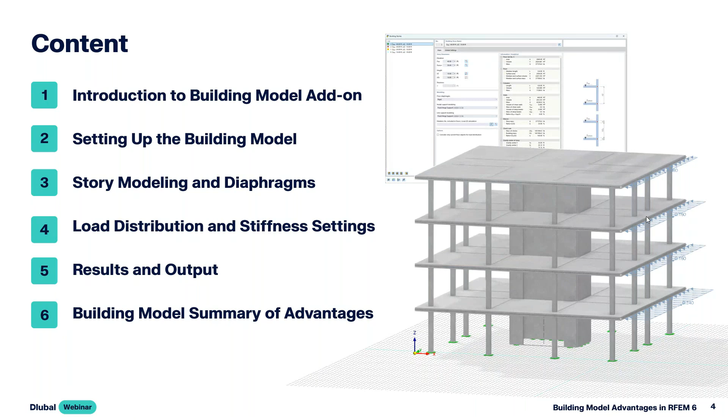For those of you familiar with RFEM 6, we operate with this add-on concept. This multi-story structure can certainly be modeled in RFEM 6 alone. However, the building model add-on offers advantages in addition to the base program. The first is to apply story-based organization. We can take this 3D model within this general FEA software and define stories, which is ideal for multi-level structures. This allows us to make quick changes to our floors rather than manually editing them.

We also can carry out the gravity and lateral analysis together within one file. We don't need two separate programs, we don't need two separate files. We'll see today how that can be carried out.

We also can simplify the load distribution and apply diaphragm stiffness settings across our floors. We'll discuss those two topics in detail today. This is certainly possible within RFEM 6 alone, without the building model add-on, but we'd have to manually modify the stiffness matrix of our floor directly. When we utilize both a semi-rigid and rigid diaphragm, we also have the ability to separate the 3D wall from the 2D floor calculation, which we'll cover in our example today.

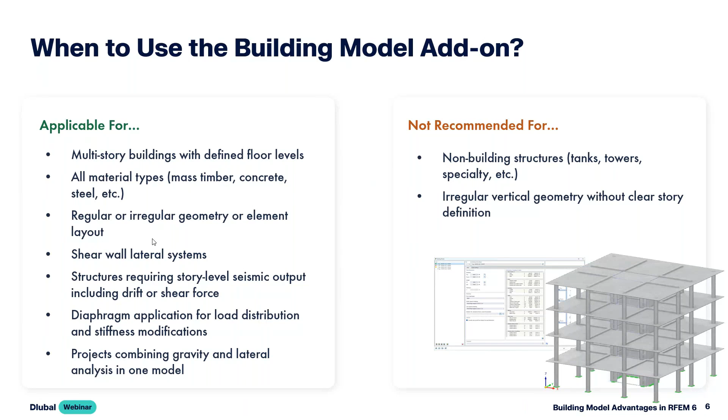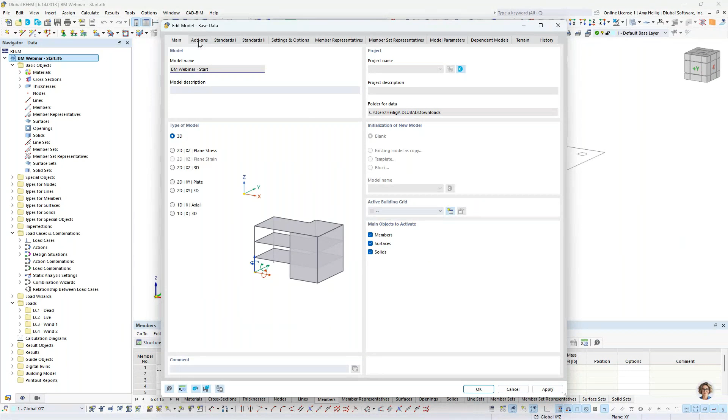Okay, so we will get into our first example today within RFEM 6 directly. When you begin a new model, you are presented with the base data dialog box, and the type of model will be in the 3D environment. The second tab within the base data is all of the available add-ons, so we'll be focusing entirely on the building model add-on, which is activated for today's example.

But as mentioned, it would be quite common to pair this with some of the additional design add-ons, like concrete design, to carry out the reinforced concrete design according to the ACI or the CSA standards. Steel design, timber design for mass timber structures is certainly also possible. We will be generating our load combinations automatically according to the ASCE 7 2022 standard, but of course, many other international standards are supported.

So once we have defined this information, we are within the main program RFEM 6. You'll notice here that I have already imported a DXF file as a background layer, which will just assist me with my modeling. If we go to guide objects, and I'll collapse this additional folder here, down at the bottom within background layers, this is where I have imported a DXF file directly from something like AutoCAD. You can see the elevation was set at 10 feet in height.

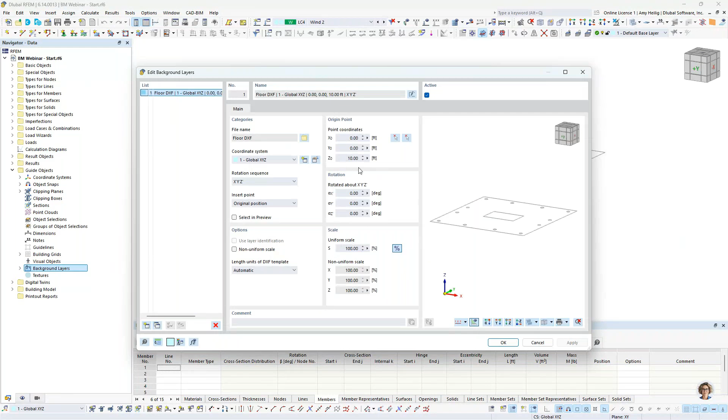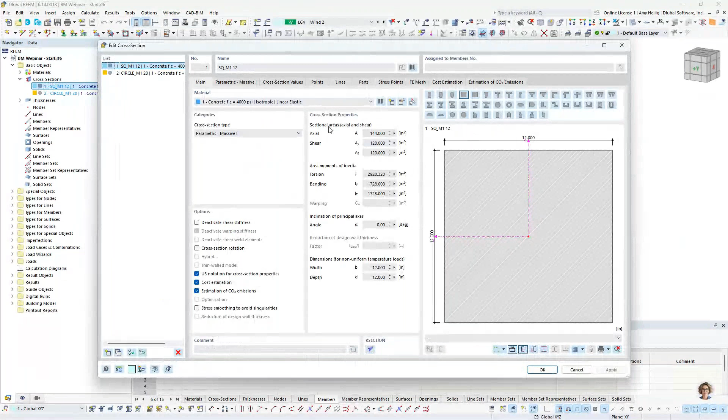I also have defined here some basic objects just to get our model started today. For example, I have defined already from our material library 4,000 PSI concrete—it will be a concrete structure for this example. I also have defined a couple of cross sections: a square cross section, 12 inches by 12 inches, that I'll use for my beams, and a circular cross section, 20-inch diameter, that I will be using for the columns, both with the 4,000 PSI concrete assigned.

I also have a couple of thicknesses defined. Thicknesses are assigned directly to 2D surfaces within RFEM. The first thickness is 8 inches, which will be used for our elevated slabs. And then we also have an additional thickness of 12 inches that will be used for the shear walls, again, both assigned with that concrete material.

So we want to begin modeling our structure, but before we do, I'm going to access the building model folder over on the left—this is only available because I've activated this particular add-on. I can right click here to create a new building story. Now, this dialog box we will get into in much more detail a little bit later on, but I want to initially define my first story with a height of 10 feet, and I'm going to create 3 additional stories here, again, all with a varying height of 10 feet. So 4 stories defined—we'll get back into this dialog box a little bit later to explain it.

So we see those listed here under the stories. We're now ready to begin modeling, and I will go into an elevation view here and utilize this background layer. With the building model add-on, we have some additional tool options here that are not available in RFEM 6 directly, and this is just to make our life a little bit easier when we're modeling these elements at every single story for a multi-story structure.

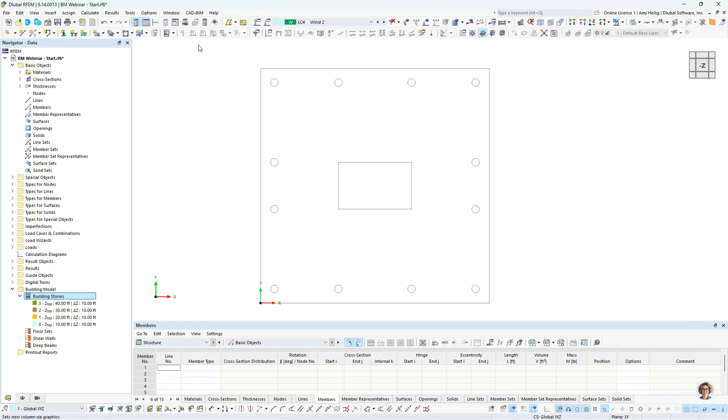We will begin here with defining and drawing our column elements. So we go ahead and select column from this special toolbar, and the member type is set to beam. Remember, RFEM is a general FEA program.

A beam is really just any type of standard member. It could be a beam, could be a column. So we'll go ahead and leave that member type as such.

The cross section for our columns, we want to toggle down to the existing circular cross section we already have defined. Now we could additionally add moment releases such as hinges at the member ends. If I don't define anything here, everything is considered fully fixed.

But you'll notice a special dialog box here, specific to the building model tools, where I can draw this column but apply it to all stories. So all stories are activated here.

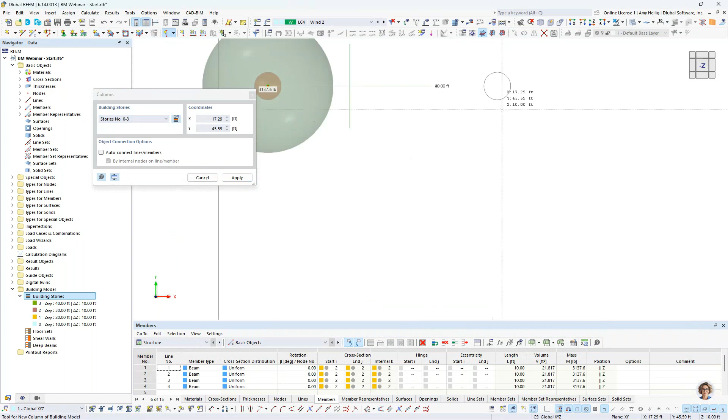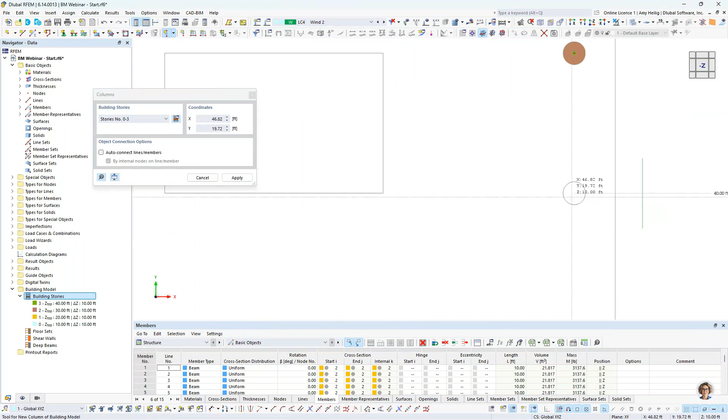Now when I zoom in to my DXF drawing grid, we can apply these columns by a single click at the center of the background layer. Now, what else you'll notice is this big ball here that adjusts every time I snap to create a new column. This is the center of mass, so it detects every time a new element is added to the model and will adjust accordingly graphically.

So we go ahead and assign the additional columns at the bottom of our page. I can right click to exit out of this tool. And if I turn this to an isometric view, you can see these columns were applied to every floor level. So again, these building model tools can be efficient.

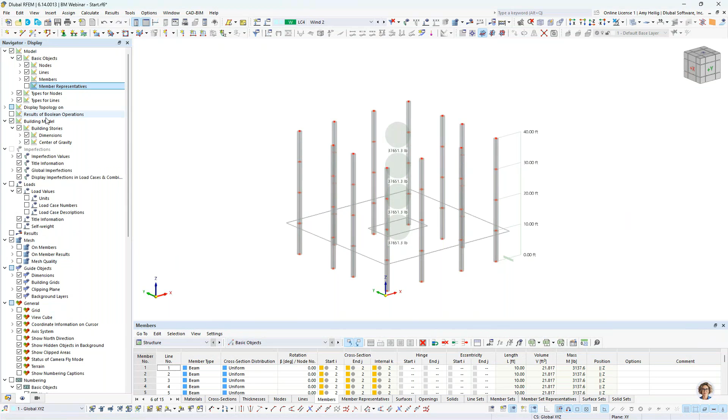I will go ahead and hide what we call our member representatives graphically. Also, if the center of gravity or center of mass gets in your way graphically, we would just go to the navigator, the second tab, and under the building model, deactivate that. So going back to the plan view, we want to move on to drawing our beam elements.

So again, utilizing the building model tools, we have the ability to select a new beam. Exact same workflow as we saw for the columns, but this time I do want to select my square cross section. I click OK, and then I am going to snap directly to the center point of my column. I right click once to exit that out.

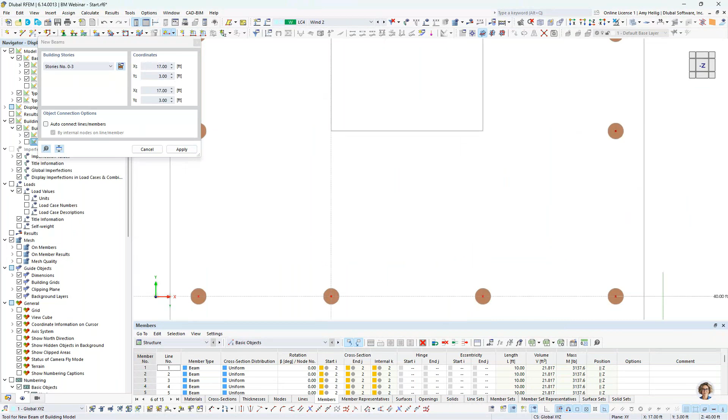Go ahead and do the same thing here. I will be connecting these to what will be our shear walls eventually. Now, these can be thought of as collector beams, for example, transferring these lateral loads from the columns to the shear walls. And we'll go ahead and apply these beams at the left-hand side and finally at the right-hand side.

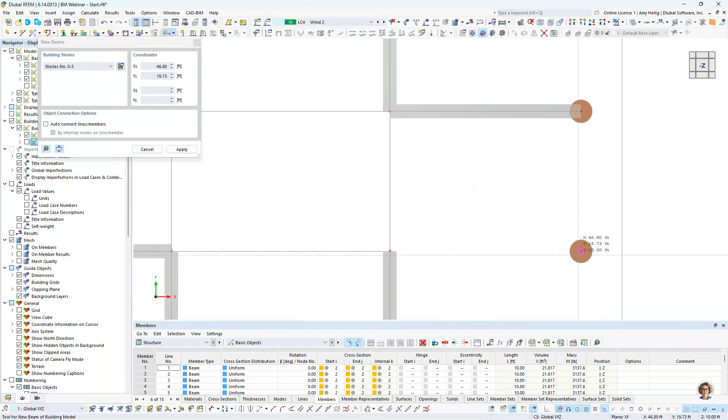Okay, so now that the beam elements are defined, those should be applied to every floor. We right click to exit, and we're now ready to draw our elevated slabs.

Within my building model tools, I'm now going to access a new rectangular floor. This is going to be a two-dimensional surface element. I've already defined the thicknesses within the model, so we will select our 8-inch thick 4,000 PSI concrete from the dropdown. I click OK, and then this only requires 2 clicks from left to right, and now my elevated slab should be applied at every floor.

So we likely need to have some opening passing up through the center of each floor here through these elevated slabs. So once again, we have a nice feature within the modeling toolbars where I can draw a new rectangular floor opening. But this time I don't want to apply it to my top story, only to the first 3 stories.

So once I have that selected, I can go ahead and click on 2 points to apply that opening. And if I toggle this to an isometric view, you will see that those openings are now applied to stories 1, 2, and 3, but not the top level.

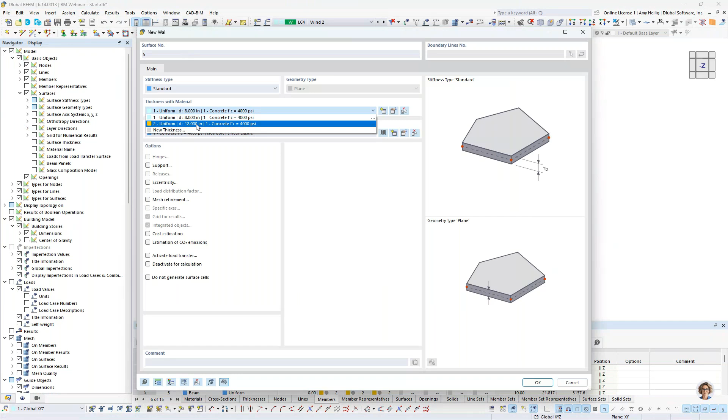The final modeling element that we want to apply here are our shear walls. So we will go back into the plan view, and we'll select a new element from our modeling toolbar, such as a wall. This time we want to toggle the thickness to 12 inches.

And I click OK. I'm going to zoom in here, but remember we deselected our top story. So I'm going to go ahead and select all stories again to apply these shear walls. And then I can simply snap here to my points to draw in these 4 shear walls.

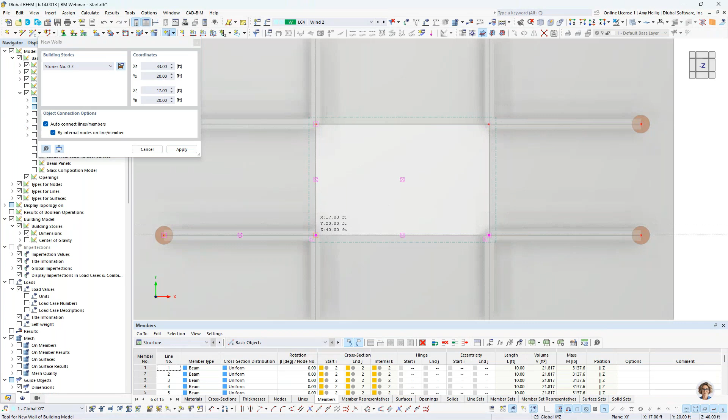And I'll go ahead and close the loop here. I can right click to exit twice, and now we have our shear walls modeled.

The final modeling step is we probably want to add in openings to the shear wall, maybe for an elevator, stairs, whatever it may be.

So going back to the plan view, let me turn this into wireframe, and I'll select only the front shear walls to create a visibility by selected objects. You can right click to deactivate the hidden objects.

Now also this DXF background, if we wanted to turn that off, we could do so within the navigator over on the left.

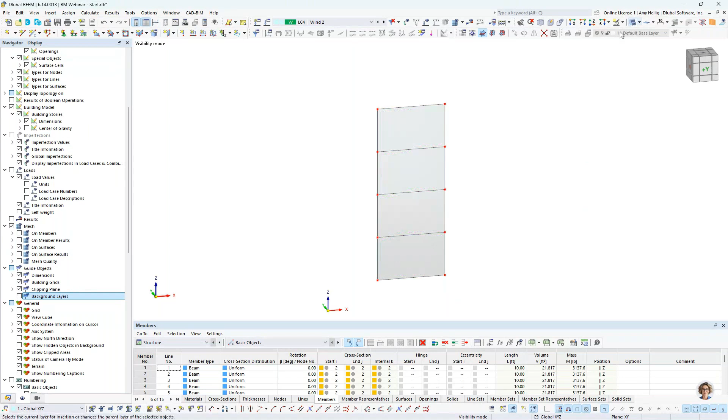Turning this into a rendered view, I want to activate my drawing grid, so we will snap this drawing grid to assist us with adding that opening, change the orientation, and I want to apply a new opening.

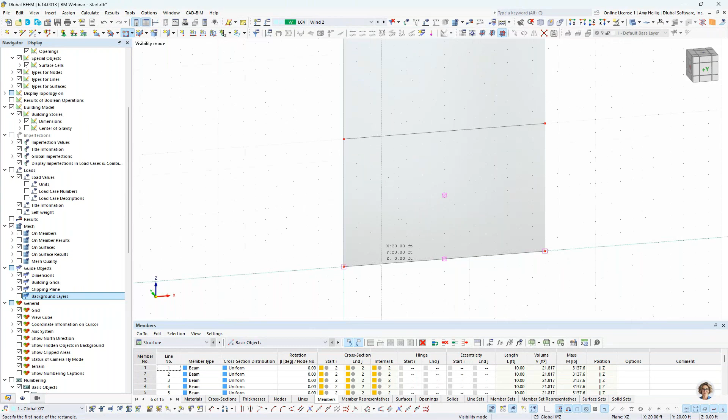This is just going to be a standard opening tool that we find within RFEM 6 directly. So a new rectangular opening, and I'm going to snap here from my point, which is about 3 feet from the edge. My second point will be an additional 3 feet, and we have our opening modeled.

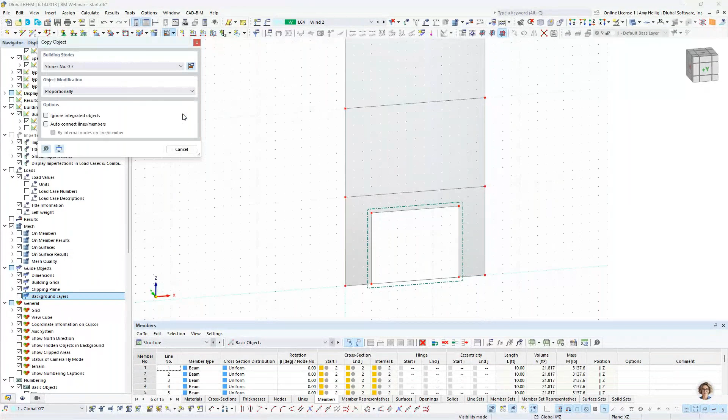A nice feature going back to these modeling tools is this option to copy an object. I certainly could use my Move Copy tool, located here in my toolbar, to copy this opening up. But with the building specific tools, when I choose the option to copy an object, all my stories are selected, and I can click on this opening directly, and you'll notice that it replicates it up to all of my stories.

The quick thing to do here for support reasons is I would like to divide this line where the opening occurs, so I'll use my connect lines tool just to break apart that line. Canceling out of this visibility mode, we are fully done with the modeling of our structure.

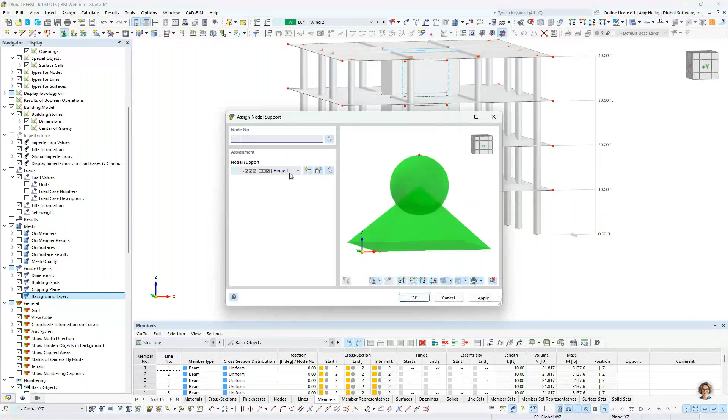What we would like to do now is apply supports at the base. So we will apply new nodal supports, and we'll use the default option here as hinged supports. I click OK, and then I can graphically highlight over or click on the various columns here. We have one more column in the back, I'll go ahead and apply this to. I can right click to exit that tool.

Now we also want to apply line supports to the base of our shear walls. In a similar fashion, we will select the new line support option, take advantage of the default fully rigid support type, click OK, and then graphically select my lines at the base of the shear wall.

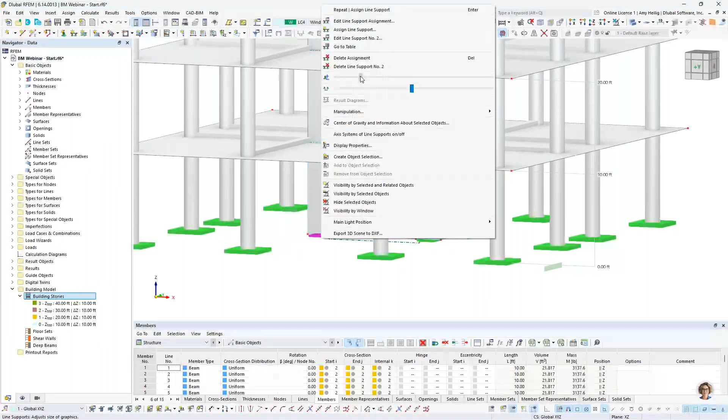So visually looking at the support options, I can always right click to decrease the size of these. Maybe if I want to increase the number of supports on a line support, I can do so. Same concept here for the nodal supports - if I want to decrease the size, we can always use this slider.

So now we would like to move on to some simple loading for today's example, and I'm going to go into my load cases and combinations dialog box. Remember, we are generating our load combinations automatically according to the ASCE 7 with this combination wizard turned on.

I did already create 4 simple load cases for our structure today. I have defined dead load with self-weight activated, we also have a live load, and then we have 2 wind loads. All of these have the action category set according to the ASCE 7, as we need to know how to combine those into the load combinations.

So jumping to the load combinations themselves, we can see all of our factored load combinations generated in orange and all of our unfactored load combinations generated in red.

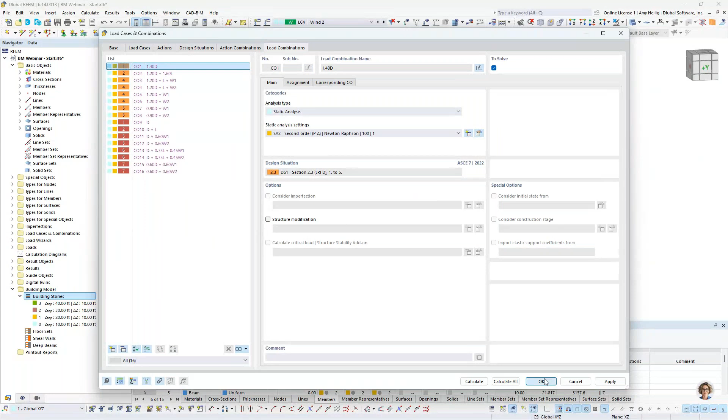Now that those load cases have been defined, we need to actually apply the loads to the structure. So we can jump to our dead load, and for today's example, very simple loading applications, we will apply a new surface load for our dead load. The load magnitude here is going to be set at negative 0.05 kips per square foot in the global z direction, and then I can graphically select my surfaces to apply this gravity load. I'll use my selection box here to highlight surfaces 1 through 4.

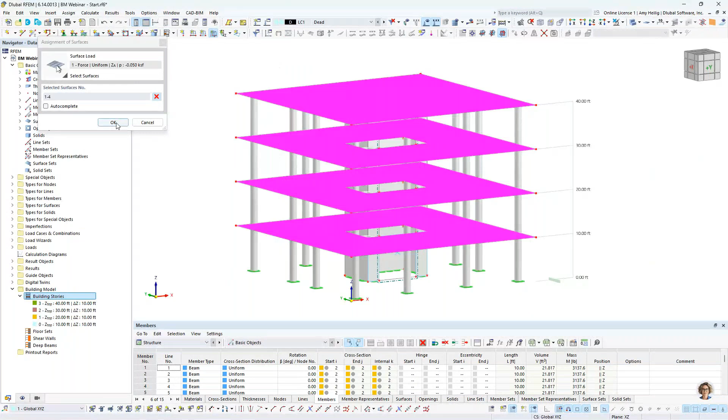If I click apply and next, I remain in this dialog box, and you'll notice in the background these loads are applied to the structures. The openings are also considered at the lower floor levels. This also allows me to toggle simply to live load. I can modify the load magnitude here, negative 0.075 kips per square foot, and directly type in surfaces 1 through 4 on my keyboard, then click OK. Same concept here for live load.

Now, for my wind load cases, I did want to make it known that we have a load wizard. We could generate these wind loads automatically according to the ASCE7. The structure is perfect for it, since it's a rectangular type shape. We can generate load cases 1 and 3 according to the ASCE7, or if we had a rigid diaphragm, load cases 2 and 4 in addition. There's also a snow load generator, so I encourage you to check these load generations out utilizing the load wizard.

But for today, a very simple example - we'll just manually apply these lateral loads. For our first wind load case, I'm going to apply a new line load, not to be confused with the new member load right next to it. A line load is applied directly to surfaces. So choosing the line load option and modifying the magnitude here to negative 0.2 kip per foot, I'll apply this in the global Y axis.

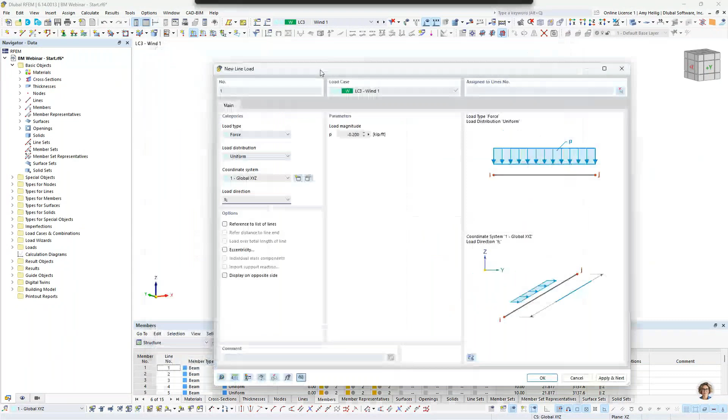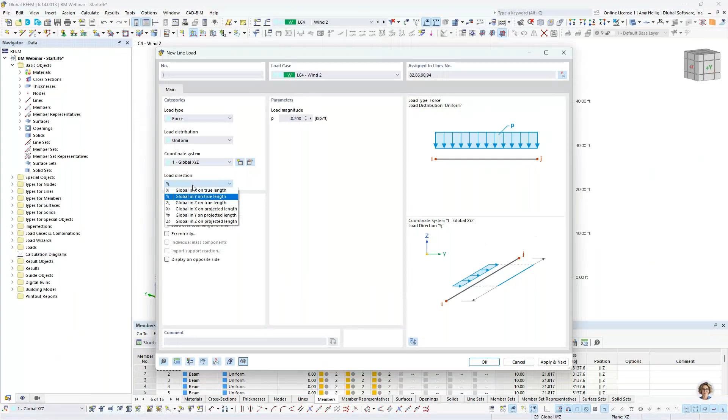We can see our axes here in the background, and then I will graphically select the lines where this lateral load will be applied. Clicking apply and next, it is applied in the background, where I can now toggle to my second wind load case and simply apply this to our line elements on the right-hand side by clicking on them. We also want to change the load direction to the global Y, and click OK. So now we have that additional lateral load for our fourth load case.

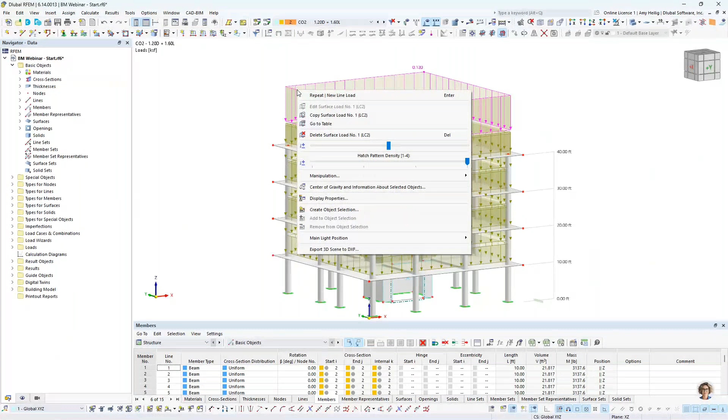If you're interested to see these load combinations applied to the structure together, we can do so by jumping to one of the load combinations. If the display looks a little too big, we can always right click and use our slider too. Taking a look at load combinations that include the lateral load, we can see that displayed on our structure accordingly.

All right, so we want to get back into these building specific features within the building model add-on itself. The next thing I want to do within the building model folder is define our shear walls and deep beams, so we'll begin first with defining a new shear wall. Before I do, I will turn this to an elevation view. There are defined visibilities here within the building model add-on - if I quickly wanted to access only a particular story, I can go ahead and turn on those automatically created visibilities, so just keep in mind that's available.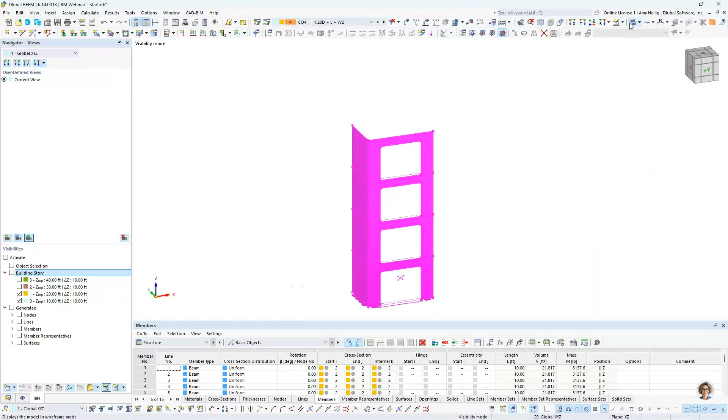But for me, I'm going to go to a plan view here, and we'll go back into wireframe. I want to select only a couple of shear walls. Now, realistically, we would probably be defining all of our shear walls, but for today's example, let's just focus on these two.

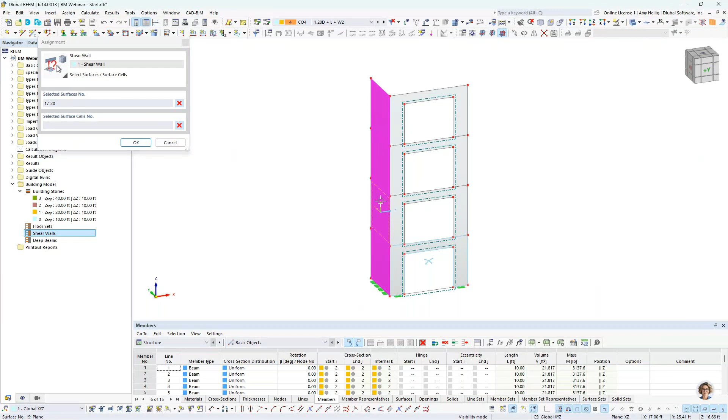So going back to our building model folder, we can right click here to create a new shear wall. The first shear wall will be defined by directly clicking on the surfaces on the left-hand side - pretty basic application here, I can directly select the surfaces. You'll notice the layout is identical at every floor, so we can select them all at once. Now, shear walls do not necessarily have to be in a single plane - they can be L-shaped, U-shaped, box-shaped, really anything is possible, but we will just keep this one as a simple application for today.

I talked about pairing this with the concrete design add-on. If that add-on was active, we would have the ability within this dialog box to directly define our reinforcement, but I didn't activate that add-on for today. We have previous webinars where we combine these two, so you can refer to that if you're looking for more specific concrete design workflows.

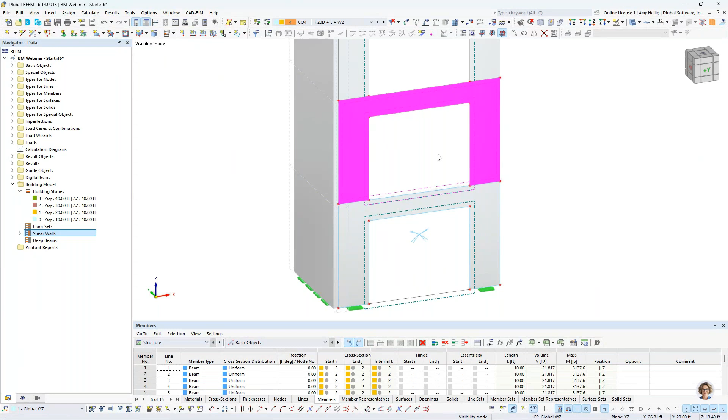Now that first shear wall is complete. The next shear wall poses a bit of a problem because we have this extremely large opening here. If I were to define the shear wall by directly clicking on these surfaces, the result output wouldn't be correct, because we're trying to sum up these forces within a very simplified table output, and when we're talking about moments and things like this, it just wouldn't be accurate with this very large opening.

So instead, we can define shear walls with what we call surface cells. That's the visible display here as a surface cell, but this will make more sense in a minute. We need to create the surface cells when we have applied a standard opening to these surfaces, and we have a nice tool in RFEM that will quickly do that for us.

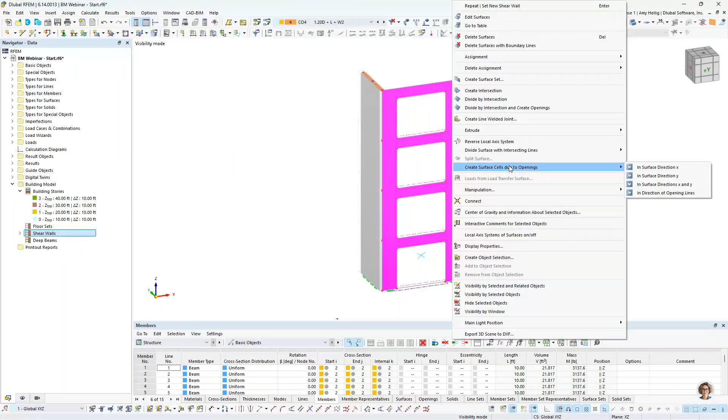So I hold down my control key, select all surfaces, and we have the ability to create the surface cells due to openings based on the local y-axis of the surface. When I do that, and I'll turn this into wireframe view, these surface cells are generated at the left of the shear wall, the right of the shear wall, and at the top. You can see those three separate elements here.

So creating yet again a new shear wall, this time I'm going to graphically select the surface cells on the left spanning from top to bottom. I'm going to create another definition here for a third shear wall where we will select these surface cells on the right, and I click OK.

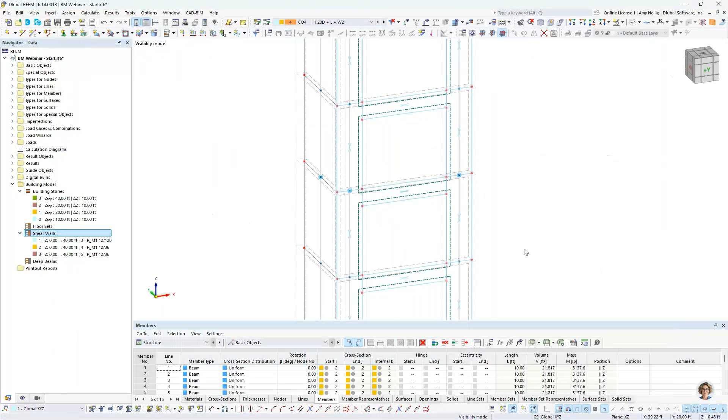So those shear walls are now defined, and I want to move on to defining here what we call our deep beams or our spandrels. So I create a new deep beam definition.

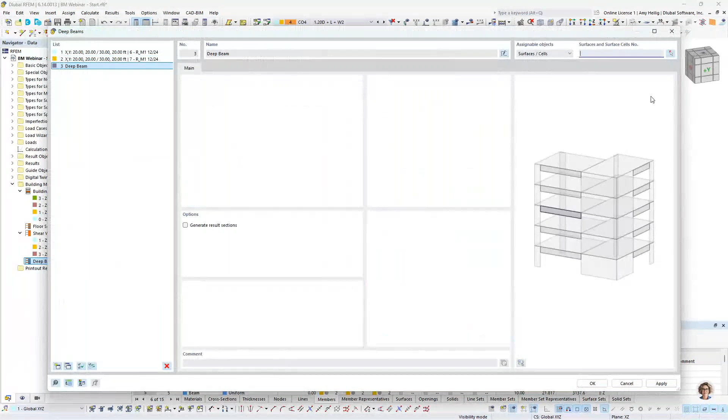I want to go ahead and select my surface cell that was created here at the top of my opening. I'm going to create separate deep beam entries here for each one of these surface cells, and we'll do it for a third time at the third surface cell here. Finally, we have one more deep beam option up here at the top. Now all of these particular deep beams have been defined and we can click OK.

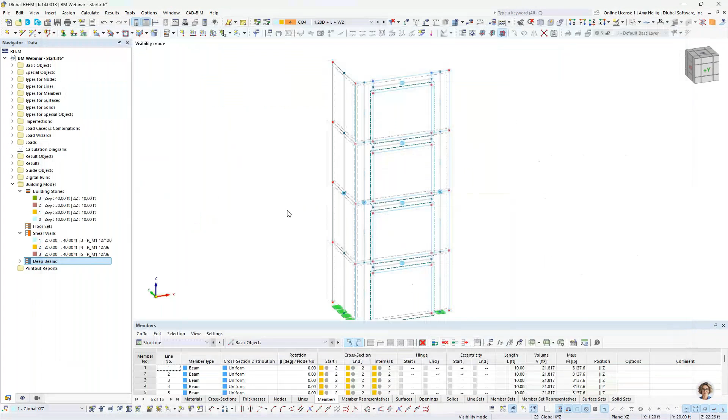Again, if we paired that with the concrete design add-on, we would also see reinforcement options there. So what is the shear wall and deep beam? What would be the benefit?

Well, right now we have these two-dimensional surfaces here, right? But by defining the shear wall on top of that, this overlays what we call a result beam, where result beams are going to integrate or sum up all the stresses and forces from surface number 17 and present it to us in more of a one-dimensional format. So we're going to be able to see the total axial shear forces, bending moments of this wall presented in a much better format than a 2D surface within this general FEA program.

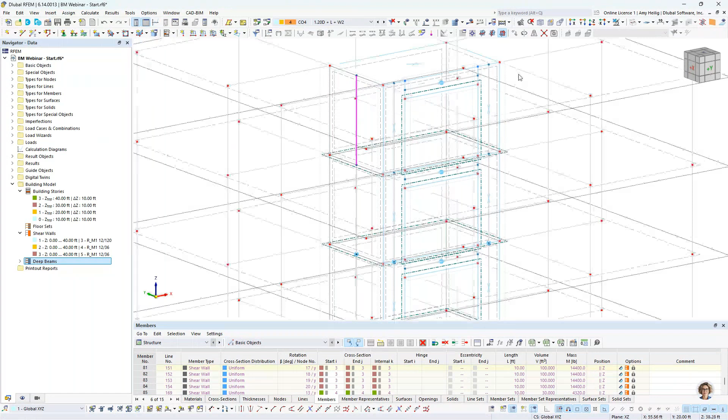Now that the shear walls and deep beams have been modeled and defined, we want to go back to the building stories. I'm going to right click here. If you remember, this was the dialog box that we were initially in to create our 4 different story definitions. So let us dive a little bit more into some of these various settings.

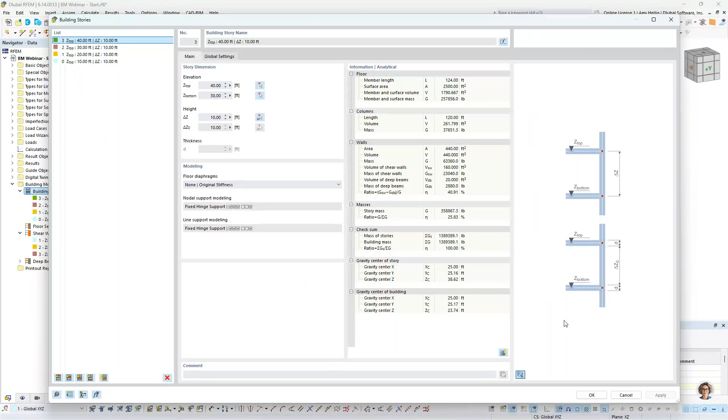You'll notice that I can toggle this view over here on the right-hand side. As I click on each story, the program shows me a nice view of all the elements that are tied to that particular story. We also have defined here the height for each one of them as 10 feet.

Now, this is all related to diaphragms. We will get into this in just a minute, but I'm going to go ahead and take a look at the global settings to explain these options further. The first is what is the ground level elevation, so that we can begin our first story. This is set as 0 feet by default, but perhaps if you are modeling only upper stories of a structure, you could modify the ground level elevation here.

The story height modification. So there are 4 options here. The default option is no selection, so we just have this dash selected here.

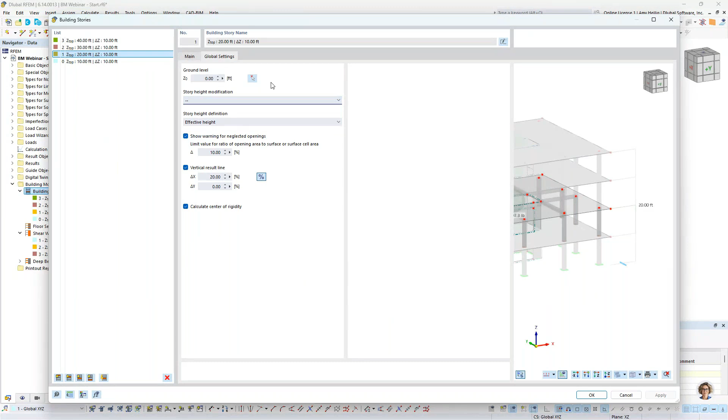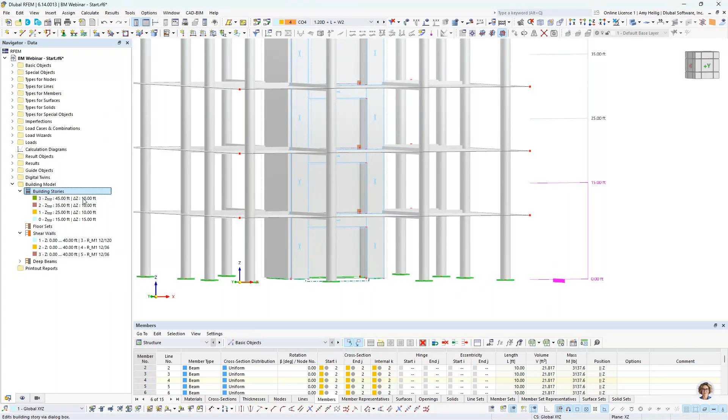What this means is that if I go back to my story definitions and tell the program to modify the first story to 15 feet and click OK, nothing is modified within the RFEM model itself. But now we have this story definition that lands right in between my stories, so it's not affecting the RFEM model directly, but rather just the story height definition. So we'll go ahead and change this back to 10 feet.

But the other options include fixed to top, fixed to bottom, or proportionally. These options refer to any intermediate nodes between stories, and for example today these intermediate nodes are for our openings on our shear wall.

If I were to select fixed to bottom and modify that story height to 20 feet, fixed to bottom means it will add an additional 10 feet to the top of this shear wall and this story itself. Fixed to top means it will keep these elements the same and add the 10 feet to the bottom of our story. Fixed to the bottom will add that additional height to the top of the story, and proportionally will tell the program to apply 5 feet at the top and 5 feet at the bottom. So let's take a look at what exactly this will do.

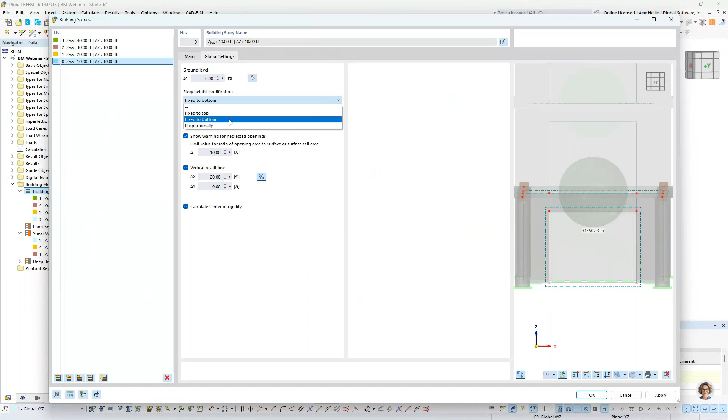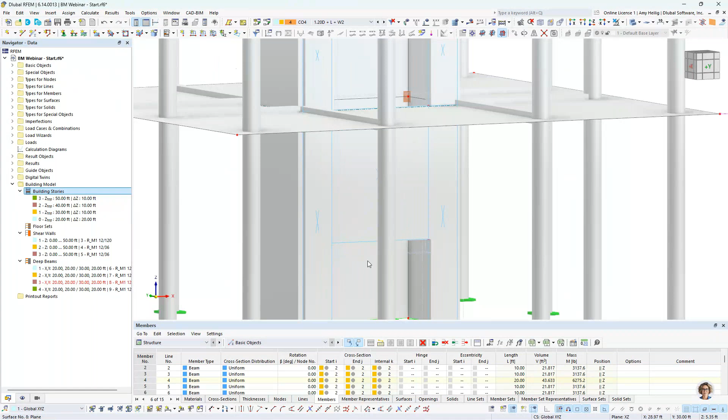So we'll go ahead and choose the fixed to bottom option. I'm going to edit my first story level height to 20 feet, click OK, and see how this affects our RFEM model here. Within this RFEM model, you'll notice that the first story height is modified within the RFEM model itself, not just with the story definitions. And because we have this fixed to bottom, it has applied an additional 10 feet here above those intermediate nodes. So essentially that's how those different options will affect our structure.

Now we'll go back to the building stories here. We want to modify this back to 10 feet, and the global story height modification settings we'll just change that back to nothing.

The story height definition is initially set to effective height, which means it measures the height from the center line of the slab to the line of the upper slab. Alternatively, with clear height, we have the ability to define a slab thickness, and this height will be measured from the base of our structure up to the bottom thickness of the slab element. So if I put in 1 foot here, for example, the height would be from the bottom of the structure to the bottom of the 1 foot thick elevated slab.

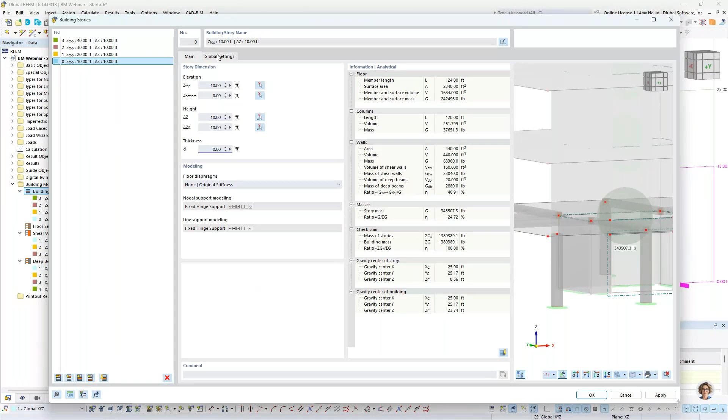Show warning for neglected openings. This is what I was talking about with something like the shear wall definition. So if we have these extremely large openings, or any opening larger than 10% by default of the total area of the surface, and we go in and try to define a shear wall like we did previously, the program will give us an error. It will say you have a pretty large opening, so the output of your shear wall forces may be incorrect. So we want to look at something like surface cells, or maybe model each of these as separate surfaces.

That's also a possibility. The vertical result line will certainly make more sense once we actually run the calculation, but this is a vertical section for a result diagram that will be displayed graphically within our results. This is just related to where you want to place this vertical result line graphically. Do you want it set as a percentage, which refers to the center of mass in the X and Y directions, or do you want to toggle this off and simply set this distance in feet from the origin point in the X and Y directions?

The final one is calculate center of rigidity.

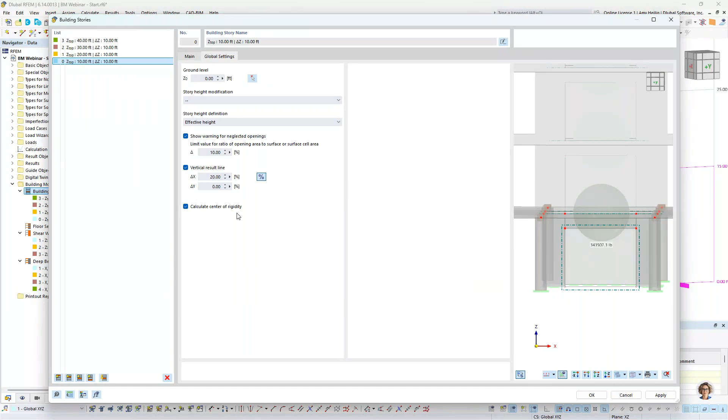This one's very interesting in the fact that whether you have no diaphragm defined or any one of the other diaphragms defined—flexible, semi-rigid, rigid—we will always calculate a center of rigidity when this option is turned on. The center of rigidity is a point at each floor where applying a lateral force causes translational movement only, but no rotation.

We typically determine the center of rigidity with something like a rigid diaphragm only. But in RFEM, it's entirely possible to determine the center of rigidity for all other diaphragm options or no diaphragm at all, because internally we convert our floors with a rigid in-plane stiffness in order to determine that point. This does not affect the analysis—we're not going to apply a rigid diaphragm for a flexible one. It's purely just used to calculate the center of rigidity. If you want to turn that off, you can go ahead and do so.

Now we're going to get into the diaphragm options. Within our drop-down box here for each floor, we have 4 different options for diaphragms: none, semi-rigid, rigid, or flexible. Let us go back to the PowerPoint to discuss this topic in more detail.

We might be wondering, well, when would we want to model a diaphragm within our RFEM 6 file versus maybe not defining a diaphragm at all? Within this table here, I have listed the 4 diaphragm types: rigid, semi-rigid, flexible, and then no diaphragm at all. Starting first with the rigid diaphragm, this is typically recommended for floors made up of concrete flat plates or slabs.

Perhaps you have some type of composite deck with a thick topping, where ultimately what we want within the diaphragm behavior is rigid in-plane stiffness, where we distribute these forces to lateral walls and frames. But what we don't want is any out-of-plane flexural stiffness of our floor contributing or polluting the lateral stiffness. In a similar manner, we also have our semi-rigid diaphragm.

This might be used for concrete with significant openings, perhaps a deck with a very thin topping. It can also be used for mass timber, but I want to specify—if you're modeling something like a CLT floor, it should be one continuous surface. If you are modeling with the joint behavior, meaning line hinges where we release the moments and account for the slip of the connections, I would not recommend a diaphragm at all. So basically mass timber or CLT, if you're not modeling those joints in detail.

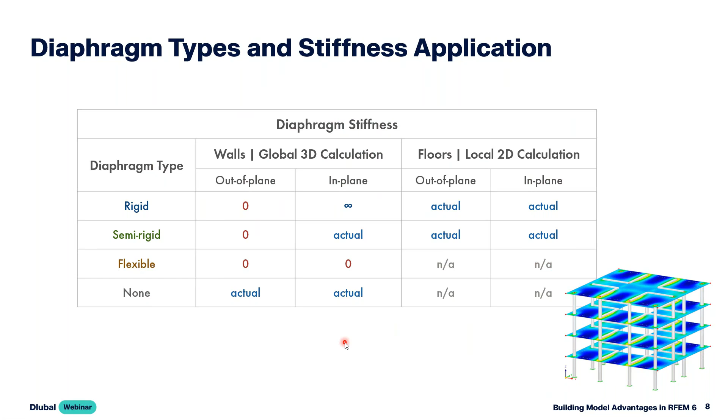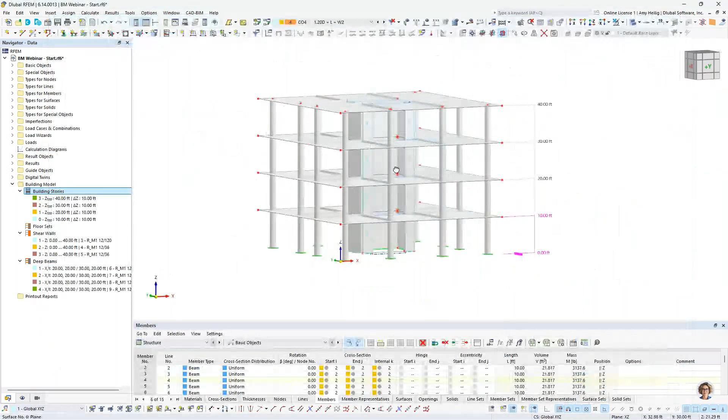So going back into RFEM, let us take a look at applying these different options within the program. You can see by default that the floor diaphragms is set to none within this dropdown, so no diaphragm simplifications will be applied in this initial case. If I jump down to something like my dead load and display my loads here, what essentially will occur is the load will be applied and distributed to all elements just purely based on FEA. This is true for gravity, for lateral, everything is applied together in these different load combinations. So nothing necessarily so unique here.

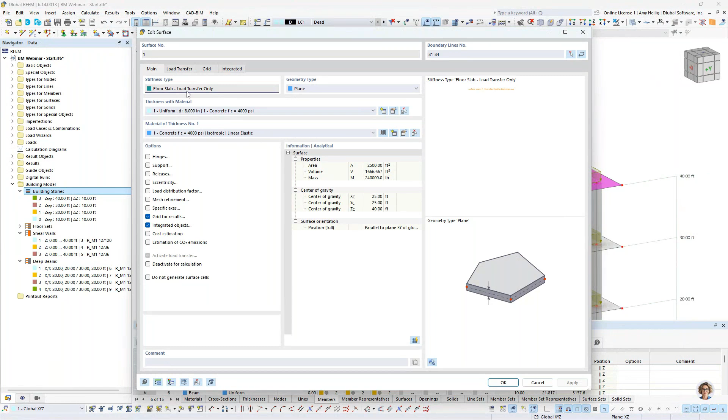Going back to the building stories, if we highlight all 4 stories and change this to a flexible diaphragm only, when we click OK and go back into the RFEM model, you can see this created floor sets — I'm going to turn that off graphically. We're still looking at this dead load case. What you'll see now when I double click on my floor is that the stiffness type went from standard to what we call load transfer only, or flexible diaphragm. I can't change this, it's grayed out because it was set directly within the building model add-on. So within the calculation, no in plane or out of plane stiffness will be used within the stiffness matrix of this particular element; rather, it is used for load distribution only.

So under the second tab, we can see the different options for these load distributions. The default here is FEA. The other three options are just simple tributary areas only, so we either have one-way area load distribution or two-way area load distribution. Circling back to the FEA option, which is set by default, what this does is internally consider this surface as a rigid element. And everywhere where we have a beam, a column, or a shear wall framing in underneath it, we replace it with a rigid support, whether that's a rigid nodal support or a rigid line support.

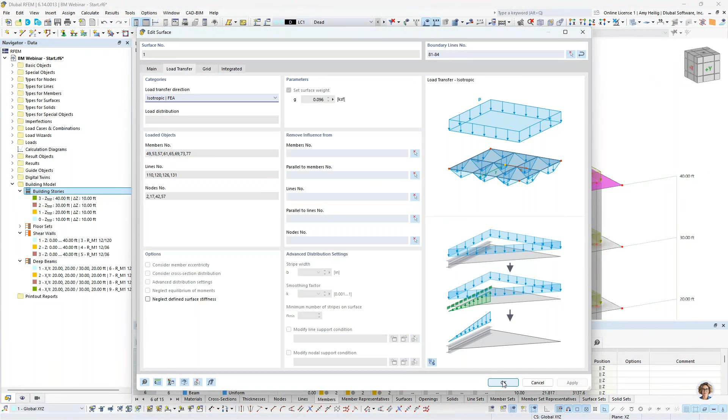We determine the reactions from this submodel, and those reactions are essentially what we use to distribute the loads to the structure. So if we leave this at the FEA option and click OK, looking at a dead load only, I'll go ahead and run a quick calculation. If I tried to run a load case with a lateral load too, I would get an instability because I don't have any lateral stiffness to my structure. Otherwise, if this was a flexible diaphragm, for this gravity load only we should be able to see what this load distribution and results look like. So we'll cycle through a couple of calculations: the first is to determine the load distribution, and the second is to actually run the analysis within RFEM.

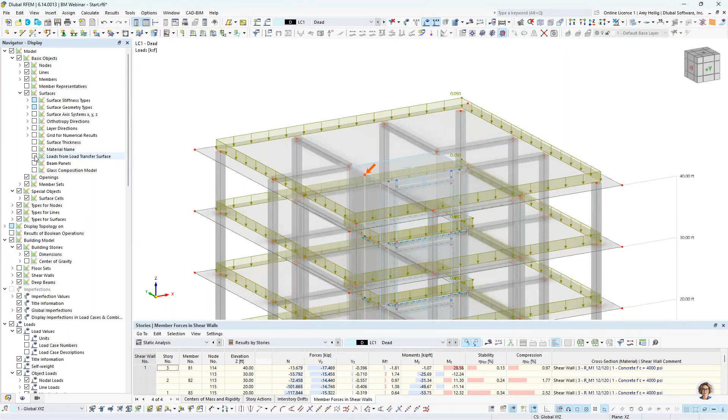So what we'll see here is our results. I'm going to turn off the display of my FE mesh, and under my viewing options at the project navigator, if I expand all the way at the top under surfaces, I have the ability to convert these loads to a load transfer surface to see exactly how they're going to be distributed. So this is what the program is doing internally, and I'll go ahead and create a user-defined visibility for only these elements with the FEA option, showing in detail how these loads are distributed to the objects.

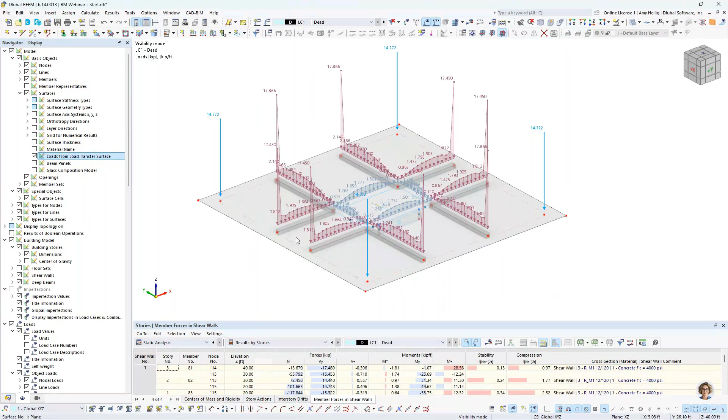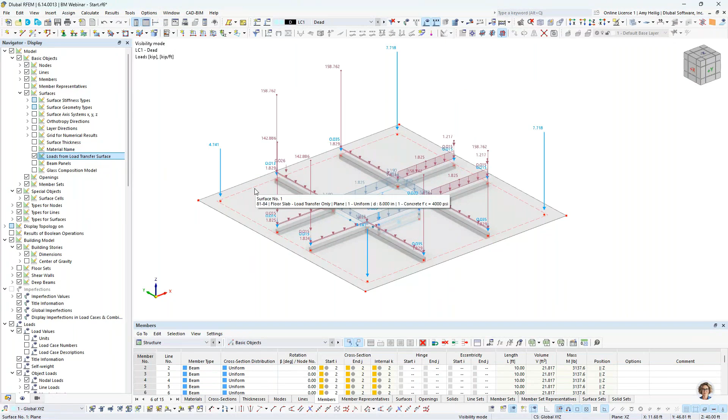If I double click on this floor and modify this load transfer option to, let's say, X and Y stripes, and click OK, it's telling me I need to clear my results. We don't need to run the calculation because it's all just based on analytical tributary area, but you can see how much more simplified this looks compared to the FEA option. So turning this back to the FEA option by default, we can go ahead and cancel out of this visibility.

I do think it's important to explain how these loads are applied when we modify the diaphragm type to something like a rigid diaphragm. So let's go back to the building model add-on, and I'm going to change all of the diaphragms now to the type rigid. Semi-rigid and rigid are very similar, so we'll just continue on with a rigid diaphragm for today. You'll notice that these options listed below are now applicable for the semi-rigid and rigid diaphragm, and these are specific to that local 2D floor calculation I was talking about in the PowerPoint.

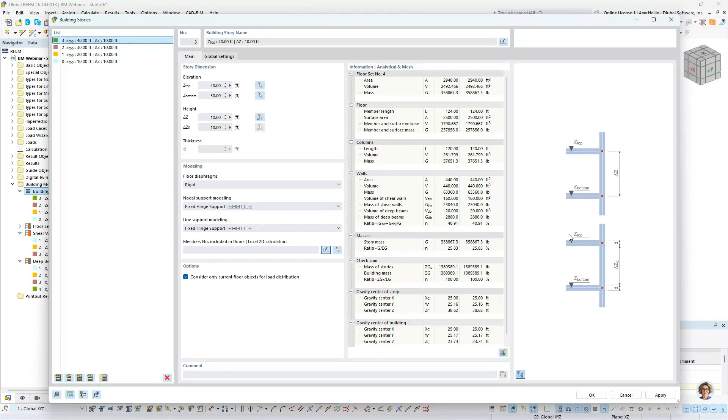Remember how I mentioned we will extract each floor out of the model for this 2D calculation, and we use the true in-plane stiffness and out-of-plane stiffness for the floor analysis and design. Well, I also mentioned that everywhere we have a column or shear wall framing in, we need to support that within that local 2D model that's going on underneath the hood. So these are the two support options available.

Now, the default is just a simple hinge support for both nodal and line supports. But within this drop-down box, you can get pretty detailed in terms of how that 2D floor element is supported. For example, we have elastic columns where you can define whether this column is hinged or rigid at the base, and hinged or rigid as it frames into the surface. The program knows the material, it knows the height, it knows the dimensions, so it can calculate the true stiffness of this column framing into the slab and apply what we call a spring constant for our nodal support.

The exact same concept applies here for line supports for walls. We can get a little bit more detailed rather than using a general hinge support.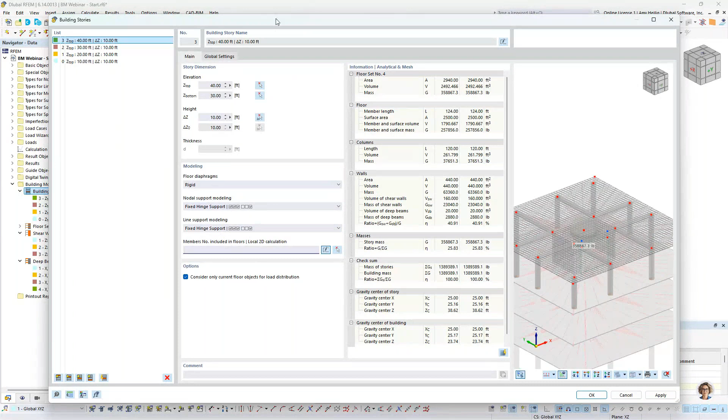Now, for members included within this local 2D calculation—if I had elements that were beams meant for gravity only, for example, beams spanning between the columns and shear walls, and I wanted to consider them for gravity loads only and not for any lateral loads—I would input them into this option by graphically selecting them or typing in the numbers. When I leave this empty, it just means these beams will see both gravity and lateral loads within that global 3D model.

Okay, so once we click OK, because we have gone through all of those details, what you will notice is that the program places these rigid links to represent the diaphragm graphically. We can go ahead and turn off the rigid links graphically within our navigator if that gets in your way. Double clicking on my floor surface, you'll notice the stiffness type was automatically updated to a rigid diaphragm, set directly within the building model add-on.

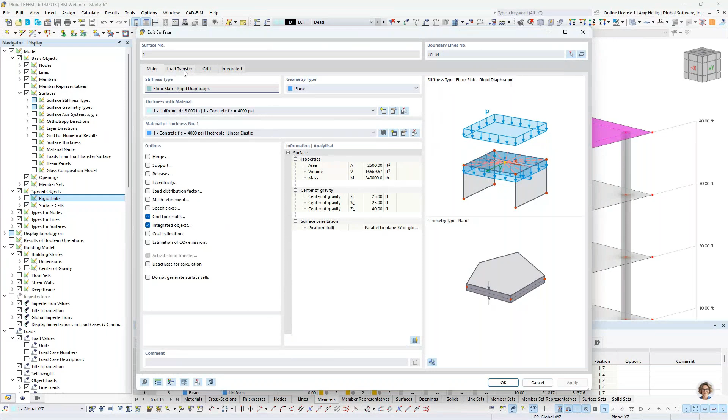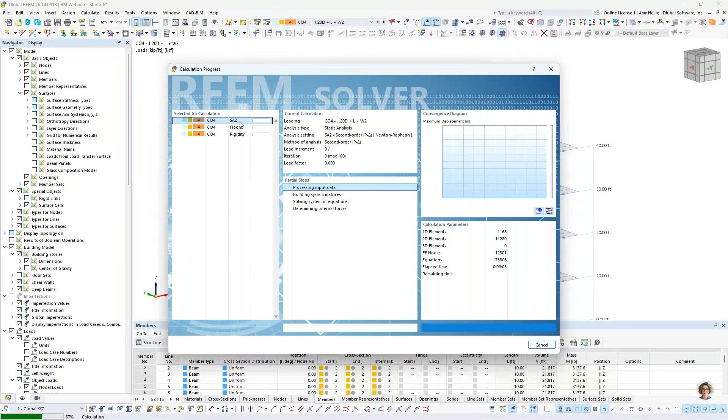Looking at the load transfer, we have the same options we previously covered. We can drop down to one of our load combinations that has both gravity and lateral loads to run a quick calculation. For this calculation, it will first go through the load distributions for the dead load, live load, and wind load, since we have that set to the FEA approach. Then it runs three additional analyses for this load combination: the first is the global 3D model where we make diaphragm assumptions, the second extracts out the floor to use the true stiffness properties, and the third is for the center of rigidity. That's why you see three separate calculations going on for this load combination.

Now that our results are complete, let's take a look. I want to start with the table results, so I'll turn off the graphical display and jump directly to the table. Within the static analysis, we have the results by stories available to us. This would not be available otherwise if I did not activate the building model add-on. So regardless of diaphragms, it's a really nice output for each story of our analysis data that we wouldn't otherwise get within RFEM 6 alone.

We can view the center of mass shown graphically as well as the coordinate points, but we're also getting the center of rigidity. You can see that's slightly offset due to that large opening, and that's given at each of the four stories. We're also given the story actions, the story shear force, so we can see the shear forces in the X and Y directions for each story. This is important for something like seismic analysis. Same thing with drifts - we give each drift in the X and Y directions as well as rotation at each story.

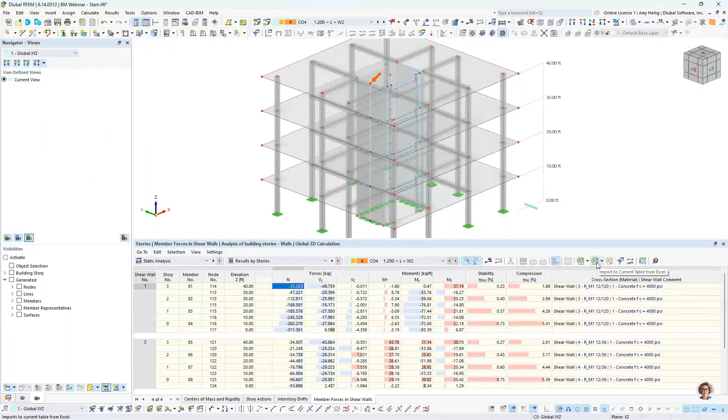Finally, we have the shear walls. Remember, we defined our one continuous shear wall passing up on the left. Each surface is now presented to us in table format, so we've summed up the internal forces of this 2D surface and give you a nice table presentation of the total axial force, total shear force, and bending moment. You can export this to Microsoft Excel at the click of a button. Of course, we could take this information further into our design add-ons as well. A nice output there for the shear walls.

The results we want to jump to now are the graphical display. When I turn this on, remember for a semi-rigid and rigid diaphragm, you'll have this new option within our results navigator where we can view the results of the global 3D calculation versus the local 2D calculation for those individual floor elements. The third option is to combine both graphically, but two calculations were carried out.

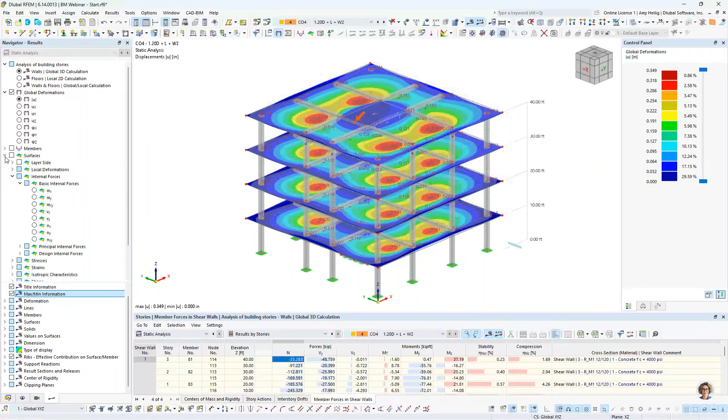Initially you'll notice the global deformation. I currently have this set to the global 3D model, but I think what's going to be most telling in this situation, remember we have a rigid diaphragm, is where we've set the in-plane stiffness to something infinitely high. The out-of-plane stiffness is set to 0 at our floor, but all other elements are active for the applied gravity and lateral loads. Looking at the surface results themselves, I'll go ahead and activate my top floor only, and display the hidden objects so we know exactly where we're at.

You'll actually see within the surface results and the internal forces, MX is equal to 0. MY is also equal to 0. That's because we do not have any bending stiffness in the out of plane direction. Vx and Vy are also 0.

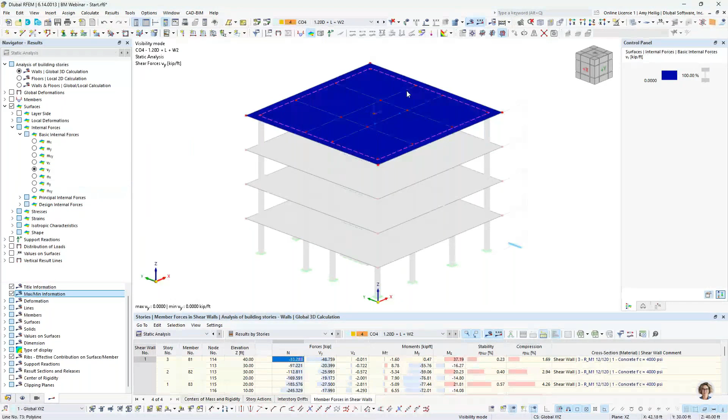But when I toggle this to that 2D floor calculation instead, remember we're now extracting out this floor so that it's a single element. We're supporting it at the column and wall locations. I actually do see internal forces for MX and MY, those bending internal forces. That's because we're using the true stiffness properties from this 8-inch thick concrete elevated slab.

And we're going to apply these loads to it again. Lateral doesn't really matter here because we've now supported it in this submodel at each of these locations. So we can take lateral out of the equation here, and we're now applying only those gravity loads to design our floor directly.

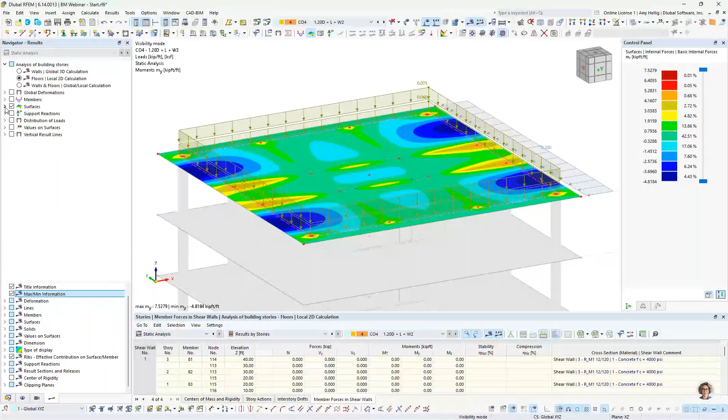What else we can take a look at is our member results. So we'll go ahead and turn off the surfaces and cancel out of this visibility mode. And if we look at the global 3D calculation, we can activate the member forces.

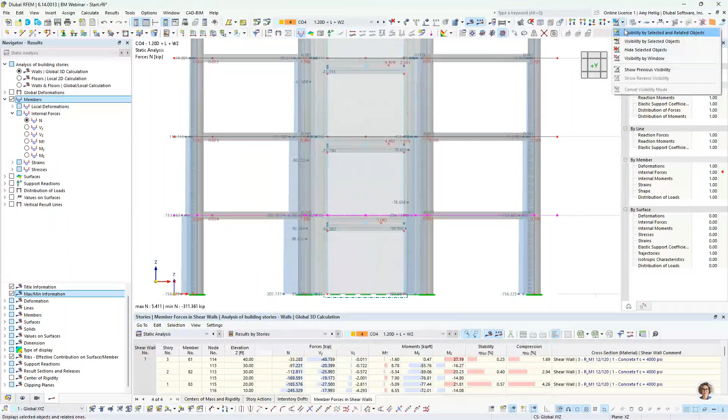For example, the axial forces. I think this is a topic worth mentioning here. I'm going to go ahead and try and create a visibility only based on my first floor. So looking at my first floor only, nope, I didn't capture my members. Give me one second. I want to capture both the floor as well as the members, but I'm trying to also not capture the deep beam.

Okay, so looking at the visibility by the selected objects, you do have axial forces within these collector elements. So I know that this is a topic that is discussed in other software, that when we have something like a rigid diaphragm, we actually end up bypassing the collector beams because these lateral forces go straight from the columns into the shear walls because every node is essentially connected to that rigid diaphragm.

But RFEM is still applying FEA principles for all of these calculations, meaning we still use the stiffness matrix for this floor element, but we go directly into the stiffness matrix and we modify the in-plane stiffness and the out-of-plane stiffness, yet we're still using the FEA approaches here. Therefore, these forces are collected in the slab element and they are transferred to these collector beams.

Now, we also can view bending moments because this isn't just lateral loads being applied to the members in the 3D model. We're also applying those gravity loads that we talked about too. We can see them applied here within the model. So we will have these beams designed for the gravity loads as well as the lateral loads.

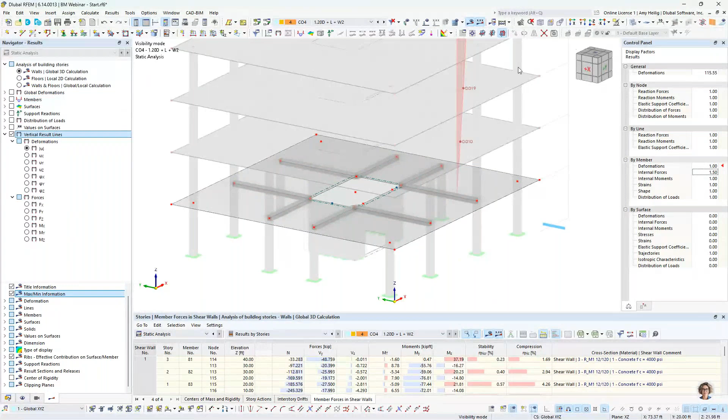The final thing to mention graphically is to go ahead and display, if you remember, the vertical result line. So within the vertical result line, I'll just leave everything hidden for now so that you can see this. This is what we set the location to in the building stories dialog box.

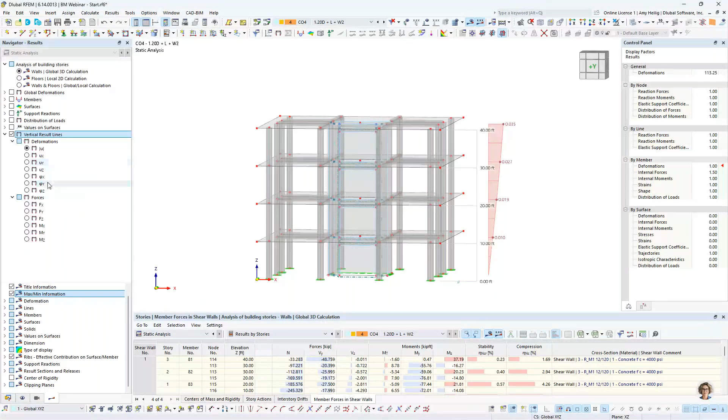So this is just a nice format here showing you an elevation view of the results of our entire structure. We can go ahead and activate here what is the shear force of this building. So we can see that the shear forces increase, of course, as we get to the base of the structure, but graphically shown here how those vary at each story level.

We can also view the deformation in the X direction. And as we would expect, we have higher deformations at the top here, again, due to those lateral loads. So this is just a nice output as well, kind of summing up all the internal forces of our structure and presenting it by each story.

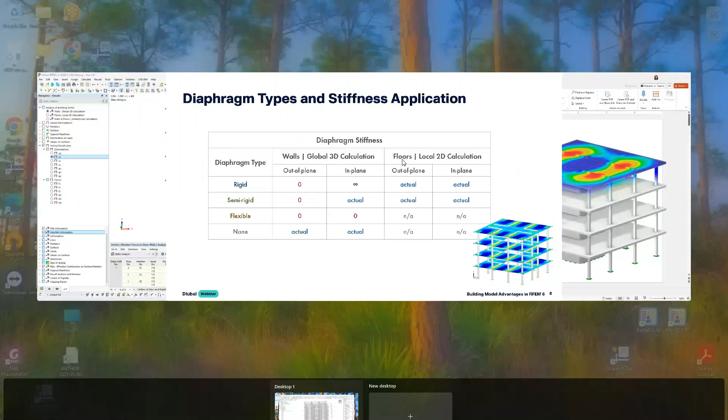All right, so that will conclude our example today. I do want to go back to the PowerPoint here to kind of sum up the building model advantages that we saw today, but also mention a few more.

So to begin, you can see how both the gravity and lateral analysis can be carried out within one file, one model. And we have the ability to automate this diaphragm behavior for both the in-plane and out-of-plane stiffnesses. And in the case of the semi-rigid or rigid diaphragms, we will go ahead and separate out the analyses into that 3D and 2D for our floor design versus all of the other elements taking those additional lateral loads.

Now, as I mentioned, RFEM is still an FEA-based solution, right? That ultimately, this is a very powerful program applying FEA principles.

So when we talk about diaphragm irregularities and large openings, this is entirely possible within the program and the building model add-on. This is not affected like what we would see in other software because FEA is used underneath the hood, and with that, we have full control over the diaphragm meshing.

We can automatically set a larger mesh, as we see on the right-hand side, or a smaller mesh. We can add in FE mesh refinements at locations where we know we have higher stress points and want to refine that. This is all possible.

We talked a little bit about those beam collector forces being captured. We are directly modifying the stiffness matrix of the floor element but still applying FEA. Therefore, the force flows through the slab mesh and those collectors do pick up those axial forces, whereas in other software we may see them bypassed.